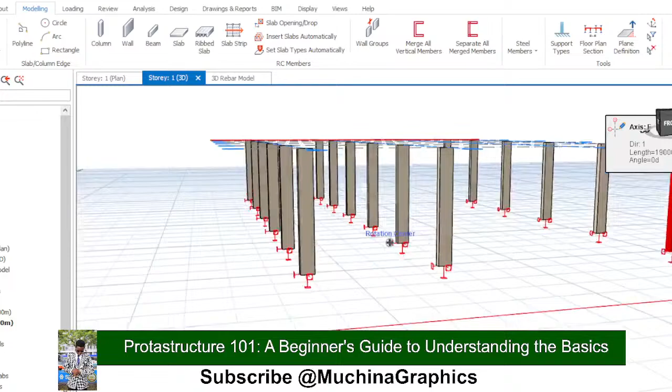It's the 3D, we get to see the column. It's not done. Let's click column again.

So you get several types of column here.

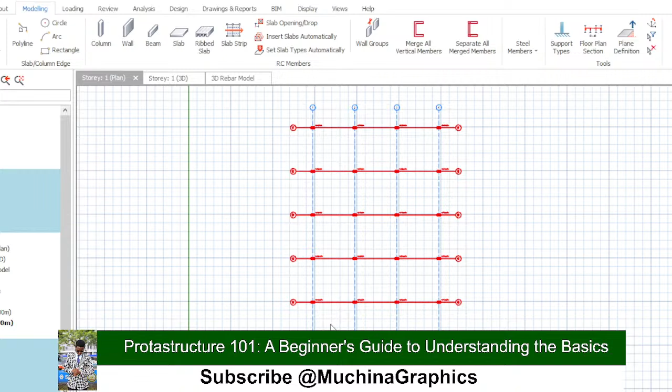I don't need these columns, so I'm just going to select them. I need to unselect cross, select all of them, and then delete. So I delete all the columns, click OK, because if I click the axis, they are going to be deleted, all of them.

So I click column again. I can change the width of that column here. I can change the dimension.

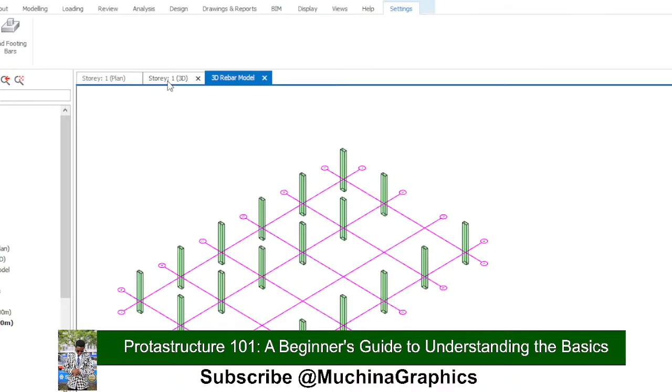I will add a kind of column. I will select there, then I'll draw there, then I get to see whatever I have. Now these are the T sections.

So I am going to view them here and select all of them. I'm going to delete columns, click OK, and there they're gone.

So column again, let's finish with each and every feature there. So you can choose how you want them to be joining, whether you need them to join at the end or the center, and so forth, and so on.

So I click center, and then I click update. So other things that you need to do: on the story, you can specify. On the drop, there is not much that I usually change.

I don't change much of them. But here, you can also change to any kind of column that you need. And with that, I am done with the columns.

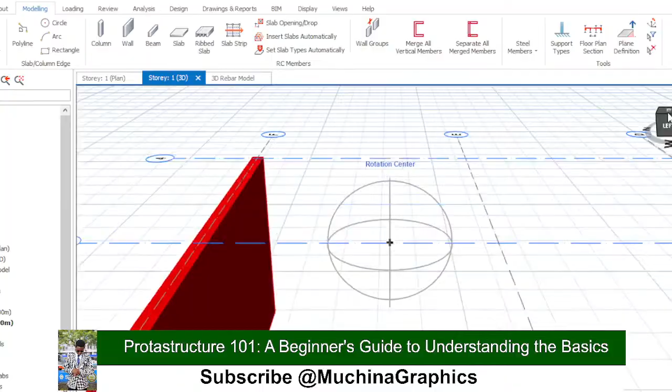So the first thing, before then, let's explore the wall, and then we can get to draw a simple model. I click wall, and here I can choose the type of wall, the dimensions of the wall, and I can also change which story it's on, and so forth.

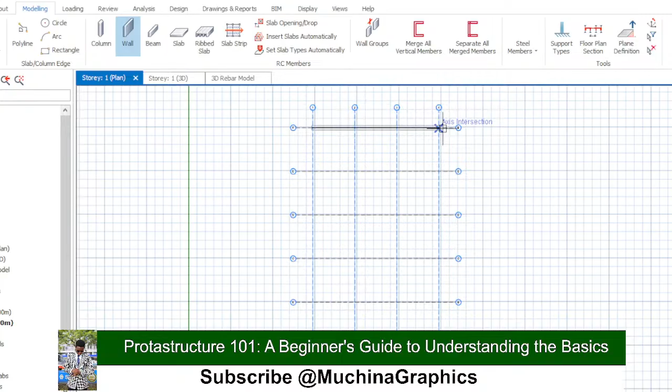So I click update, and then if I come here, I can draw a wall like that, and then I can view that wall, and it will be there like that. So that is how you draw a wall in ProtaStructure.

That's it and done. Let's get to beam. I'll just delete that wall, and we'll be using these combinations.

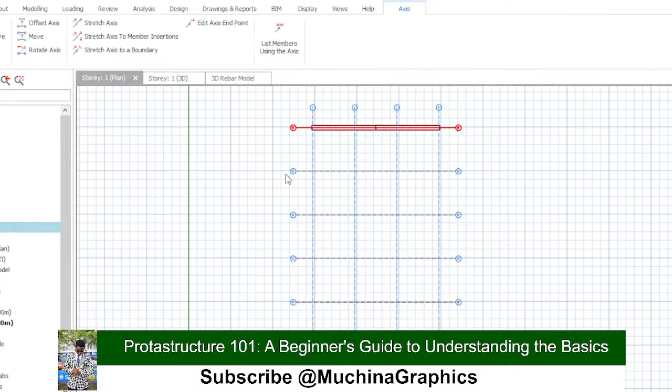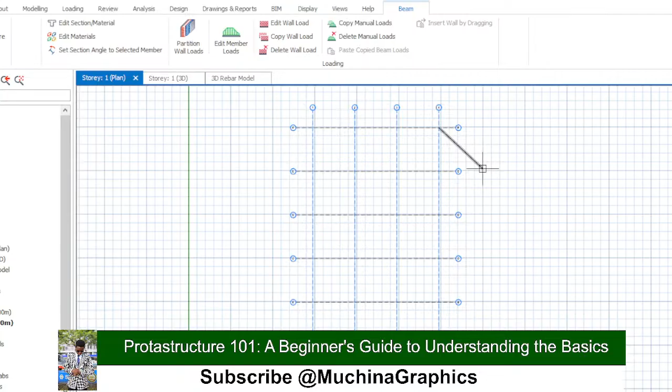So let's go to beam. I'll click there, and then set the height to 500 mm. Here are the labels and other things, the support band - I can also change board color for the beam here. I click another one, and another one, and click escape, and then I can view that one. There I have my beam. So that is how you get to draw a beam.

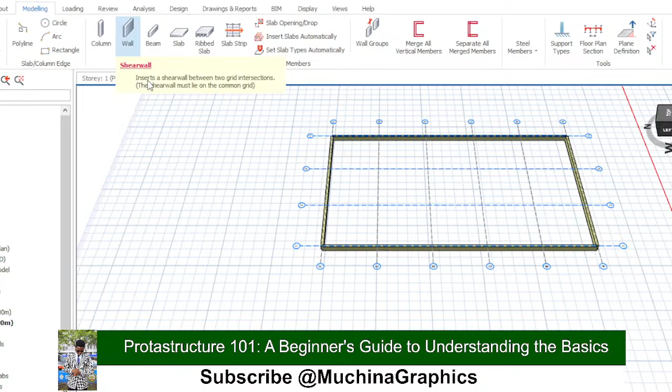With that said, let's insert a slab. You cannot insert a slab without inserting your beam first. So let's draw a slab. Let's go back to our plan. I will choose a slab, and then I choose here, and then my slab will have been inserted like that. So here I have a slab that I have already inserted, and it's fitting nicely.

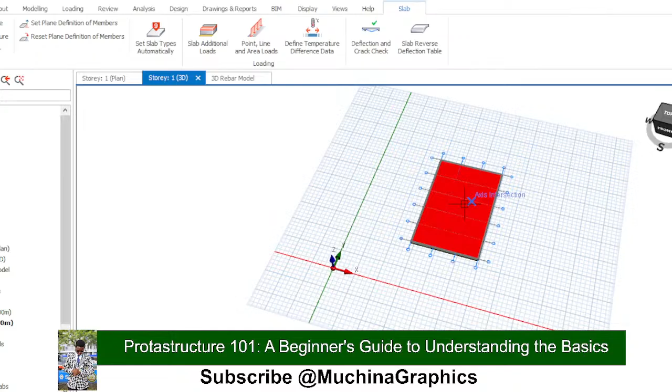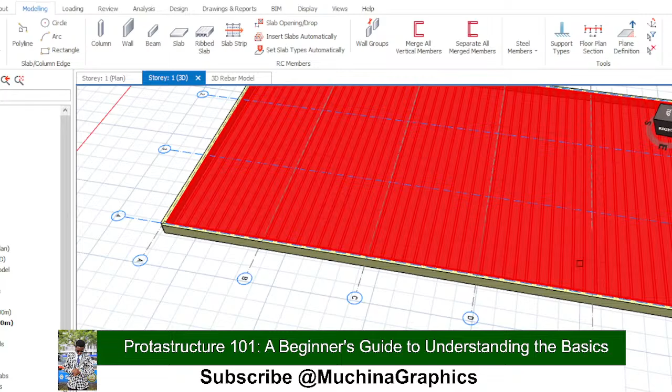That's it and done. Let's get to insert it. You have to specify the part that you need to insert the slab, and let's see whether it's changing. So you have to specify the place. You just need to click there, and the slab will be inserted like that. Now the ribbed slab - the beam reaches it there, and then I can view it like this. So this is how the ribbed slab will look like, the slab strip.

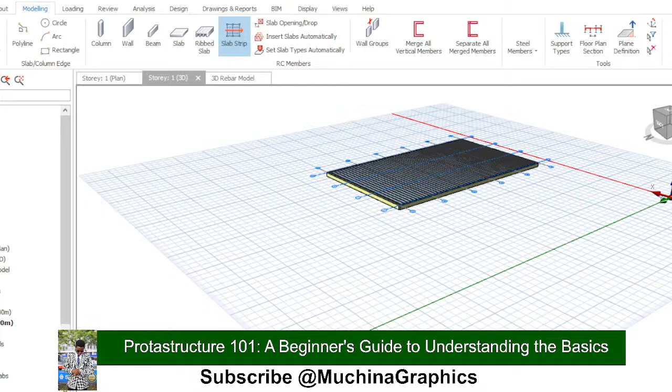But that's it and done. Let's get to steel members. Before we get to steel members, let's check out how we can use these combinations in this tutorial, because this is to help you get started. So that being said and done, let's delete. I'm just going to delete the slab strip, click the beams, and I click OK.

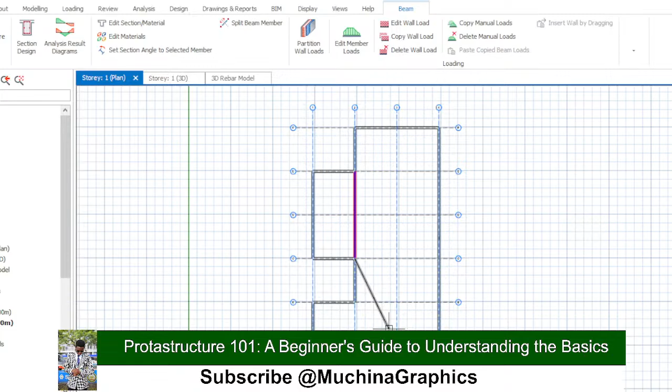So I'm just going to use this axis, orthogonal axis that I generated, and then I'm going to insert first my... and click there, then here. So I click there, I join with this one, and also join with this one. Click yes, like that, and I click to show you how you can do it.

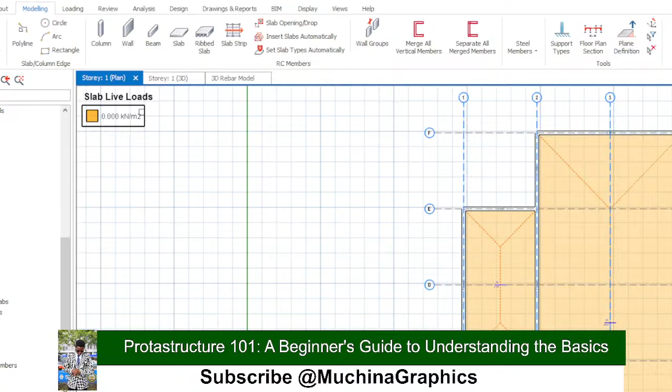So I'm going to slab, click there, click there, like that, and then click update and cross. So the slab I can insert - go to view, display, whatever I have.

So I have this thing done already, and then the next thing, I'm going again to column - I will insert my column there, my column there, my columns there, inserted my...

Let's try it. So I will go to generate story, and then I copy this one to one, and then click OK. Do some magic, click there, and then click one, click two, and click one, click two, and then get to this one, and then click OK, and then you get that.

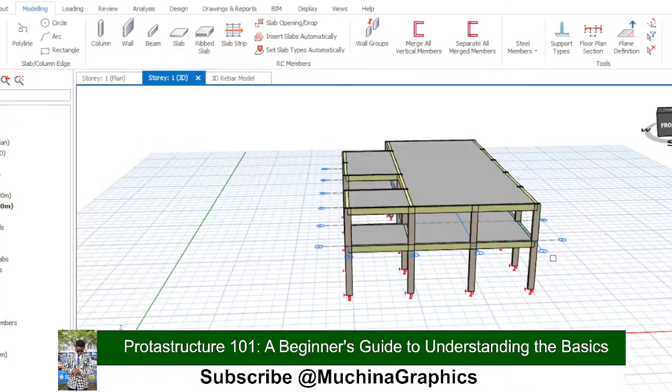We cross that, and we must view it and see whatever we have. So we have generated another floor from the floor that we had, like this, like that. Very simple and very cheap. Our building, cheap.

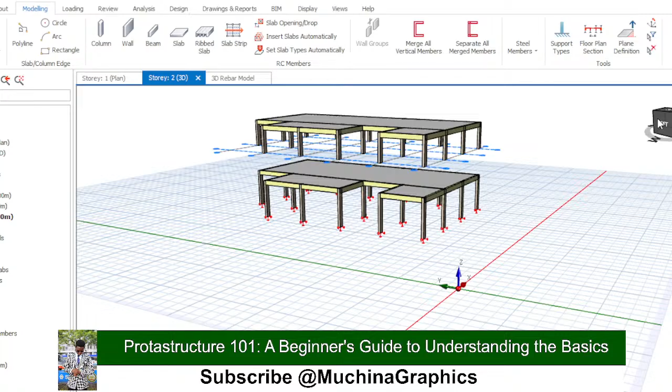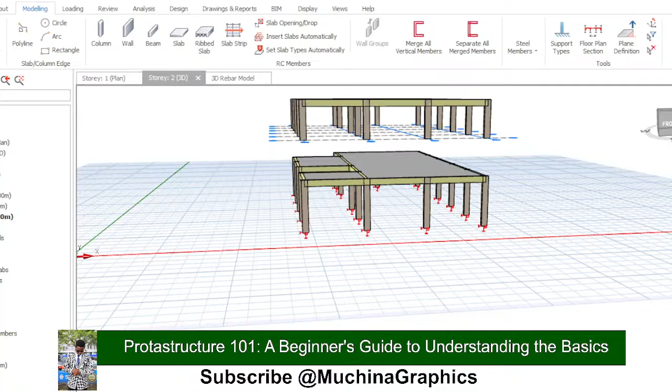Whatever it's doing here, we don't appreciate it. So I'm going back, Control Z, Control Z. We are at the end of it, so I'm going to generate now. You have to be very wise on generate, click enter. I click now number one on number two to generate on number two. Click OK, like that, and then I get to cross.

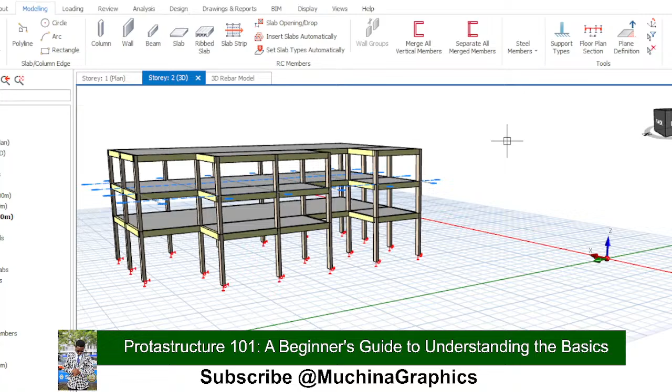So we have a two-story here, like that, and we have been able to generate the members, the frames here very nicely, and then we can be able to apply the load, the load bearing, and other stuff. So that is very easy and simple.

So the next thing I'm going to generate so that it will be a 3-story. So I'm just going to again insert this, click there, click number 3, click OK, and then now I'm going to insert to generate, click there, click number 3, number 2, click to number 3, and then click.

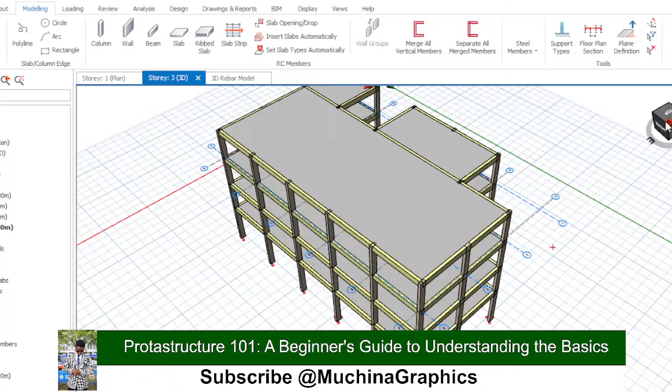So that's how you get to combine all those that we have ranted about. But perhaps if I needed, I would just insert them. So I go here, I can just draw my wall, click wall again, click there.

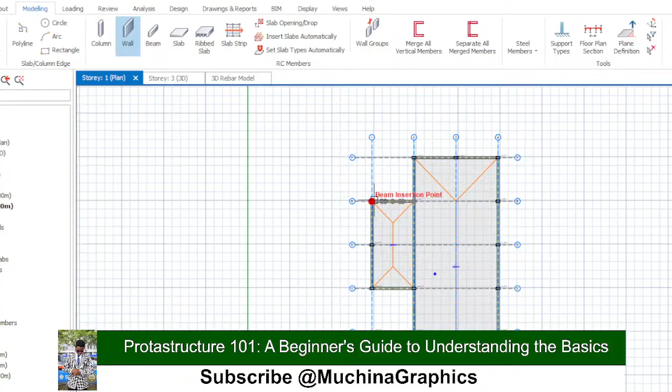Update, click there, it's not inserting, let's check. I'm going to try wall. It's much advisable that when you are drawing your walls, just draw them before so that like before you go to the next story, you insert everything, you generate the next story like that.

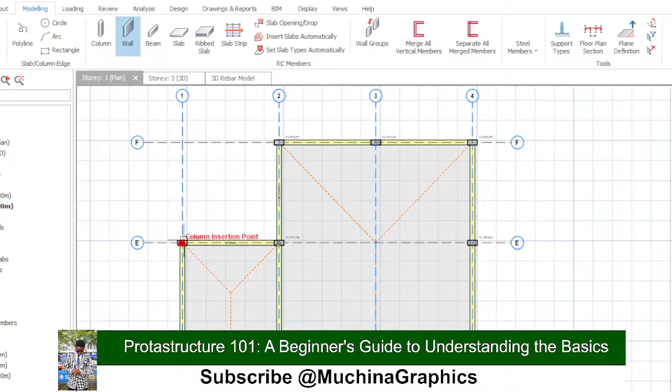I try this to there. Don't know why it's refusing. Let's try outside and see. So it's a problem with...

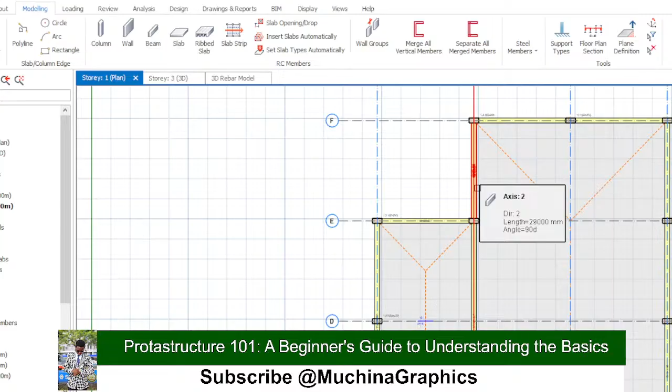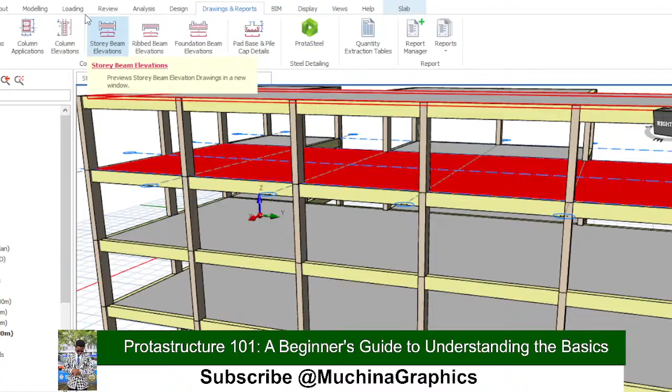So after we had crossed, you can also add loads on your slabs and other things. And you can also get to add your live loads if you want. You can add live loads.

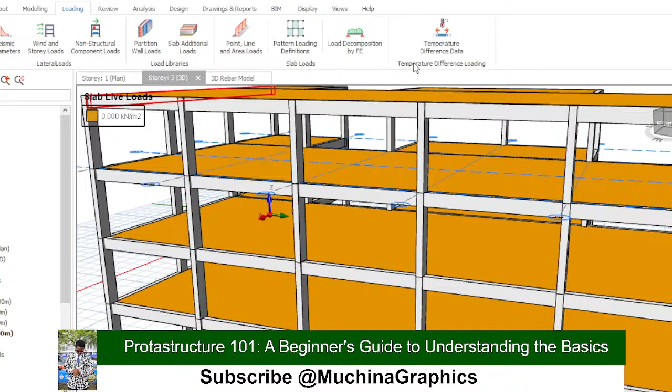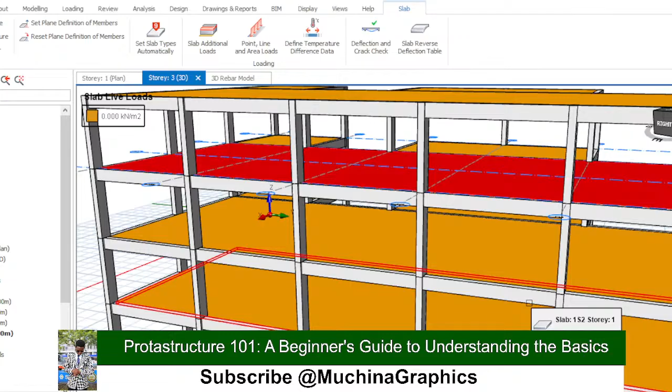That is, you can specify - for example, if I go to loading there and then slab, additional loads, and then I edit material, I specify, for example, to be 90, then click additional again, make it 60, then okay, apply, and then I have that as my load. So that means already I have applied a load, a line load there, and that's why it has changed to that color. So you get to view your structure like that.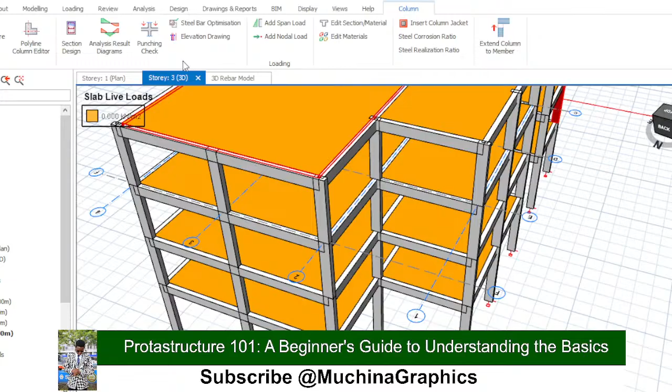So with that said, a new file. So I just click here, then I click new project, and then I click yes. So I want us to check the steel structures, the steel members, so that you can get started with the ProtaStructure using reinforced concrete structure, using reinforced concrete members and also steel members. So we get to look at steel members and how we can use them to design our structures.

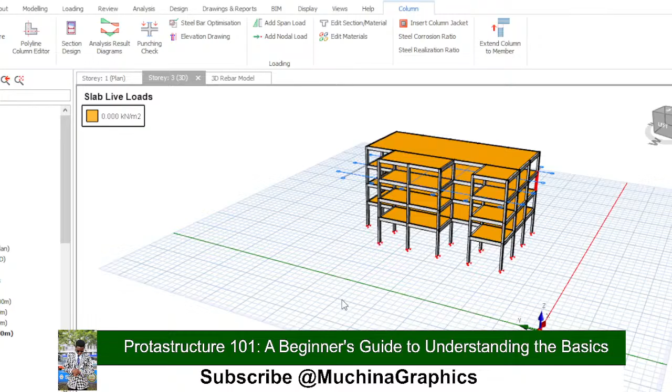So I'm going to go to retraining 2. I'm going to click here, go to retraining 2, and then I'm going to use the UK standards. But of course, we can change, but it is still that. I click OK.

And then now we can get to structure, like we can get to steel members. So the first thing that I'm going to do is to introduce you to steel, and then we will be able to - this is just a simple project that we did right there, and we can get to move. At the end of this, you will have something created for yourself. So sit in and let's get started.

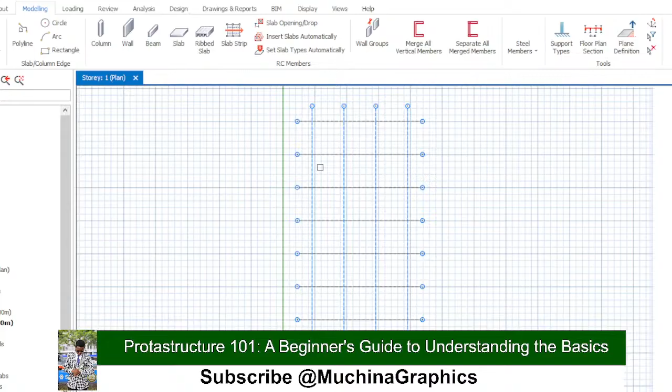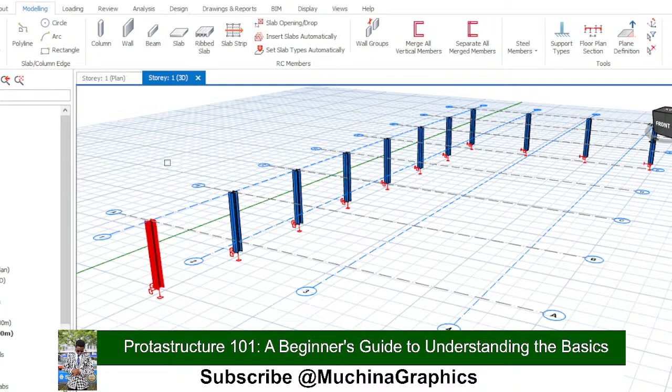So if I need to insert a column, I'm just going to insert it the same way I inserted my other things. I can put them there, and then I can view them in 3D like that. So here I will have my steel members like this, very nicely, like that. So let's go back to column mode once again.

Then you get to specify the label. You can specify the story, and also change the angles, but that's not much important. The much important thing is how they join with other members, and that you get to specify here. On the type, you can change the type of steel that you're using. For this case, you are using the I section, that is the UC, and then you can specify if you need an I, if you're using a rectangle, or the circle one.

If you're using other types of steel, you can specify what type of steel you're using. For this case, we can change it if we want, but I think we're okay up to there. Next I'm going to insert some steel there and some steel there. That's how you can work with steel, and then you can view them all together, like this. We're going to do a simple project here and see how it's going to be. So stay tuned, there is something special for you.

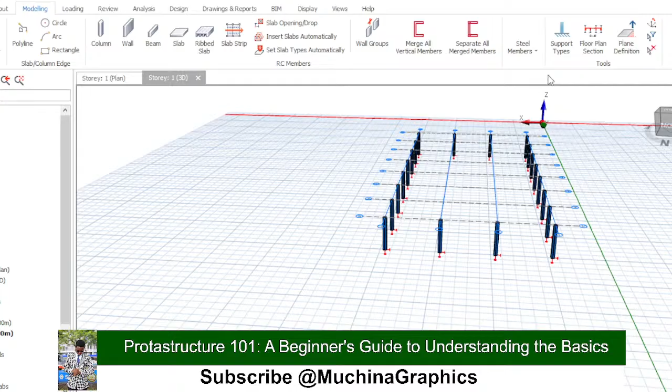So that's it, insert our beams here and click update. I'm going to insert my beams here. Go back to beams, insert beam here to there. Click yes, click here, yes. Click here, yes, click there, yes.

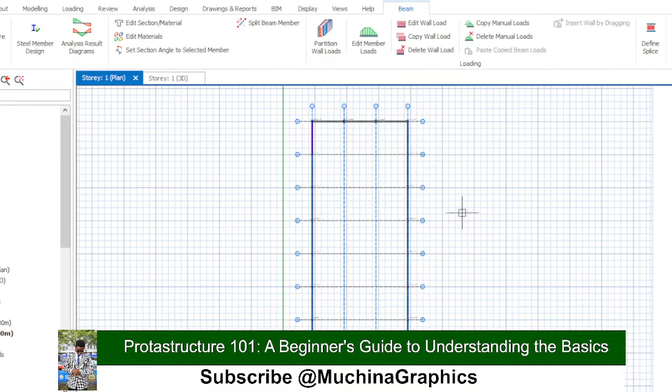Like that, so you can change the labels and other things. I click escape, but I think I'm okay like that. I'm going to click OK, and then I can view how I have connected those bits. The next thing is to go to my structure, and then here I can also connect them the way that I want them to be.

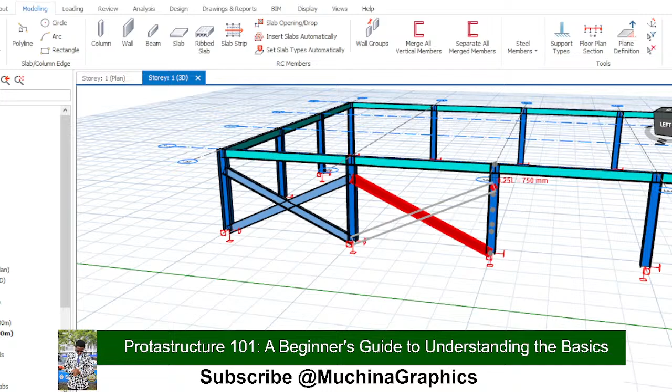I can connect frames. Let's go to frames, frame members. I click update, then click here, and I can join them here. I can change several things here, like this. Connect there, connect there, connect there, connect there, like this. Connect here, connect there.

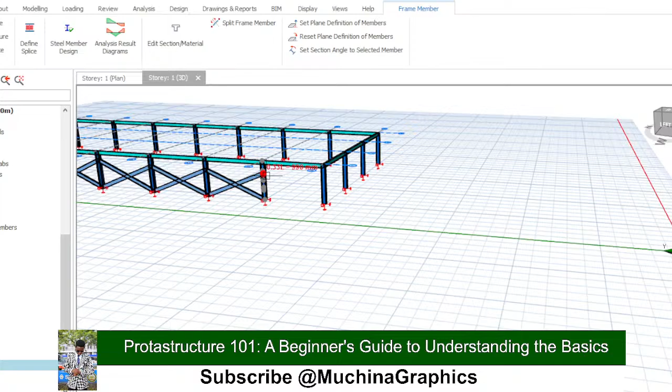You can do magic with this software if you master it. It just requires you to master it. I'm going to select there, put there, there, select there, there, there. We're going to do one side only, the rest you can do it for yourself. Update again, then I'm going to click there.

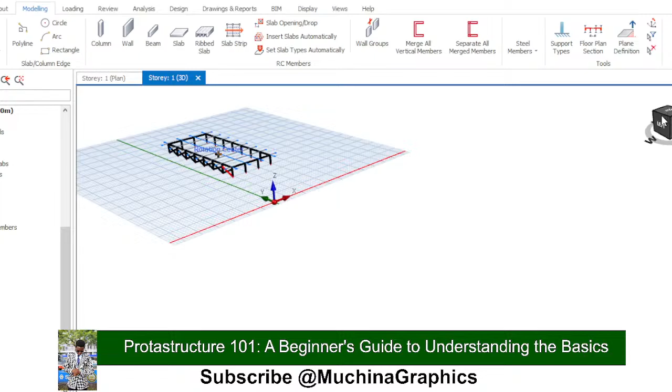Okay, let's finish at that. Okay, it's there again. It was running slow, but we have been able to do it. I cross this one, then I will rotate it like this, then increase it like this. This is how you can do the other sides, and then if you do all those sides like that, something will be coming out.

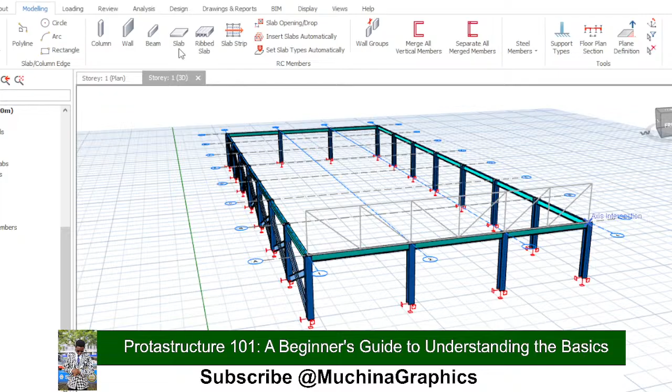I don't want this tutorial to be so long, that's why I'm so fast in doing this. I'm going to select the truss, select here, press there, and select the type of truss that I need. For this case, I need more circular, and I'm not going to change much, but if you need to change something, you can change there. Then I will have them like this, and insert them like that, click escape.

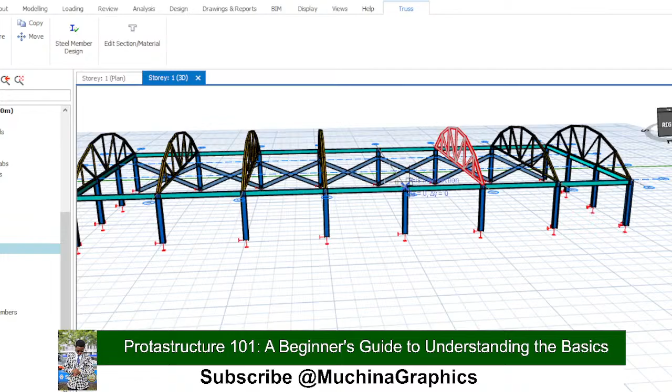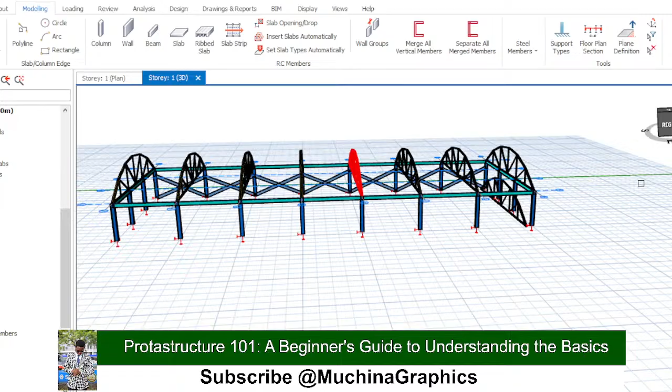So I have my trusses. I'm going to select this one, right click, click properties, then click OK, and then you can insert another one here. Click this one, copy, and then paste, I think. So copy here. Control Z, Control Escape, and I think with that we will have that.

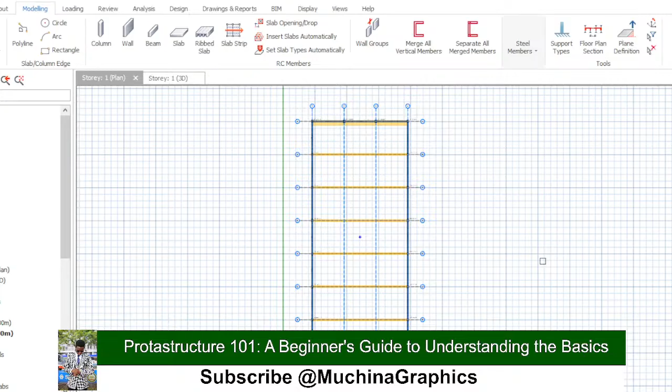So at least we have a structure there, made of steel, like a greenhouse or something. The next thing is you're going to insert frames before, so that you can be able to insert cladding. I'm going to select frames again.

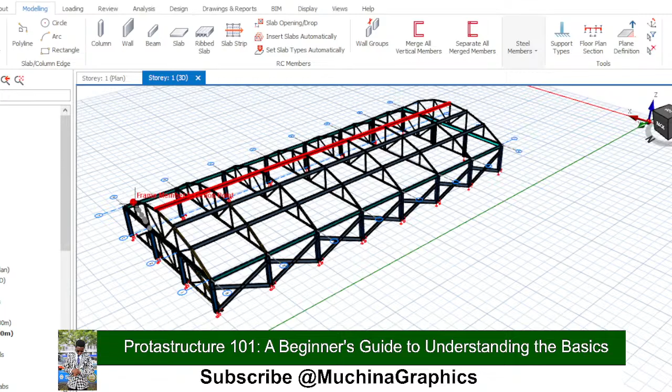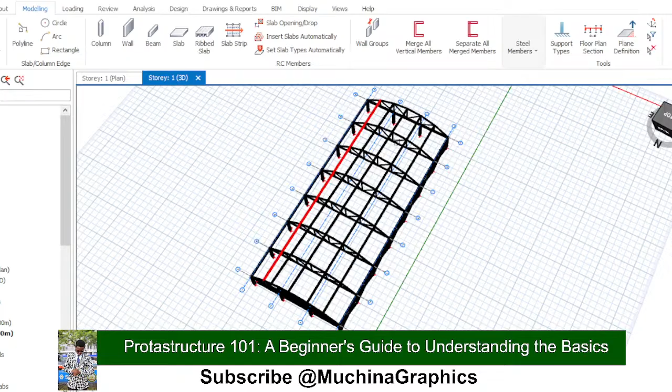Then select there to the end, select there to the end, like that. I need to make sure everything is okay, so I need to be moving around it to see that I am aligned like that, and then I think we should be okay with that. Let's go to cladding, let's wait for it.

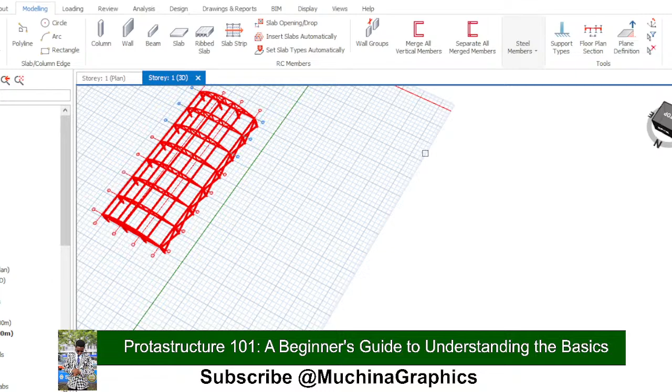So with that, something here, we have done a mistake on the columns here. Okay, it's here, we're going to select this one and delete that. We did it by mistake.

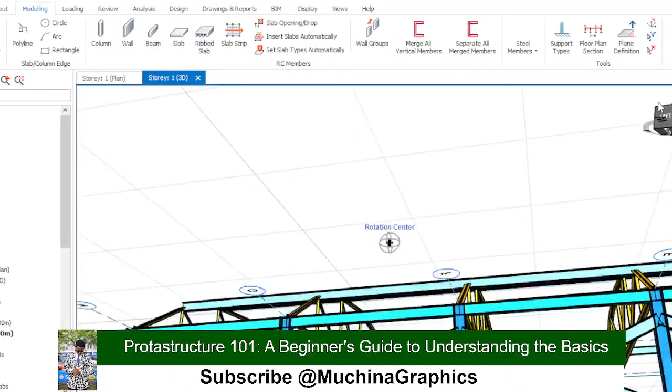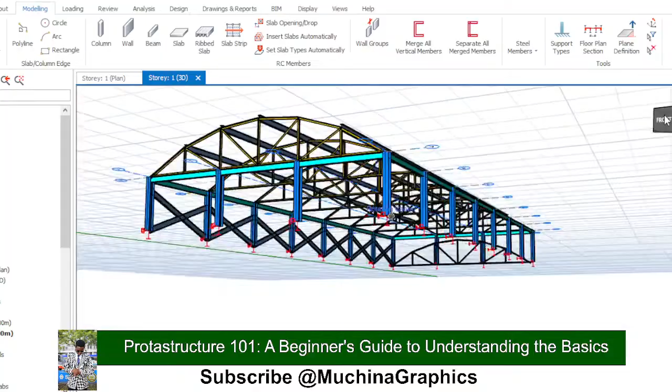With that, that's how you can get started. So if your church needs a structure like this one, or a better one, you can just volunteer to do it, or give it to us to do for you. That's how we get to design more safer structures, because more safer structure is better life. So with that, I want to come to the end of this tutorial, hoping that you have learned a lot.